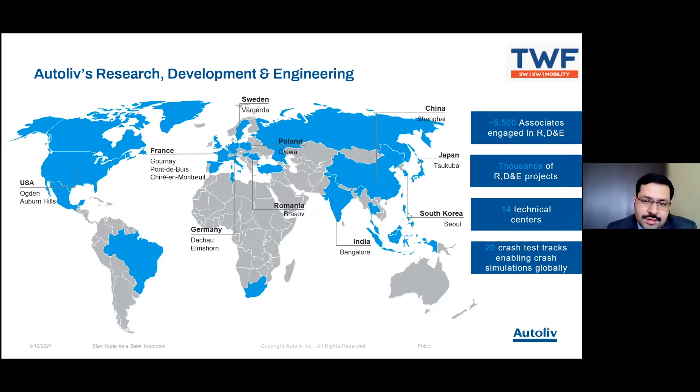Why this is relevant, I can also connect to the United Nations Sustainable Development Goals. These goals are mainly divided into 4 sections: universal access, efficiency, green mobility, and safety. When we talk about safety, there are 3 main targets in the Sustainable Development Goals. I would like to highlight target 3.6: to reduce road traffic injuries and deaths by 50% by 2030. There is also target 11.2, for safe and sustainable future transport systems.

So with this background, I'm going to talk about the relevance specifically in India. What is the current situation in India of power two-wheeler users?

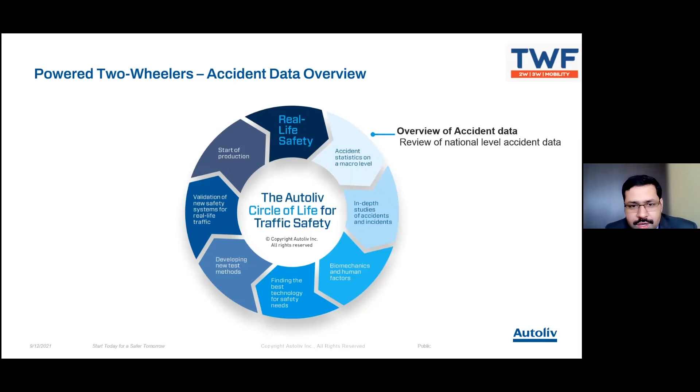Once we identify the problem, we can look into what kind of best technology solution can be given. Then, to evaluate these new solutions, we need to develop a new test method and validate the new safety system for real-world crash situations. Then it goes to start of production, and again the product will be tested against real-life safety. So the circle continues. With this background, I would like to start with the overview of the national level data from India.

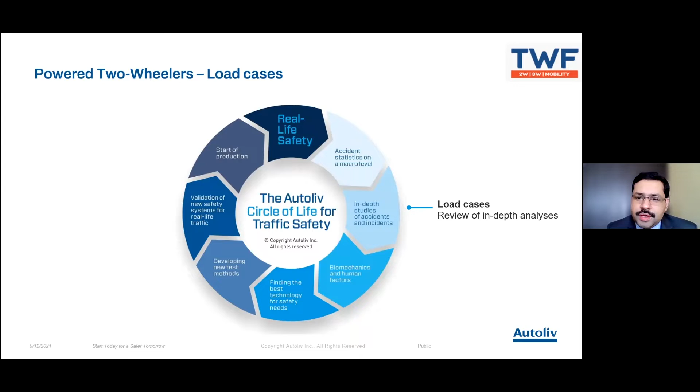Now I would like to show some of our research that we have done for different countries using in-depth accident data. Here I would like to show the data from three countries: China, Germany, and India. You will see the most frequent top two load cases from each country. As you can see, the crash scenarios and collision partners are different in different countries.

For example, in India, head-on collision with a passenger car is the most frequent, and the second most frequent is head-on collision with trucks. You will also see that the speeds, or average speeds, at which the impact occurs are also different.

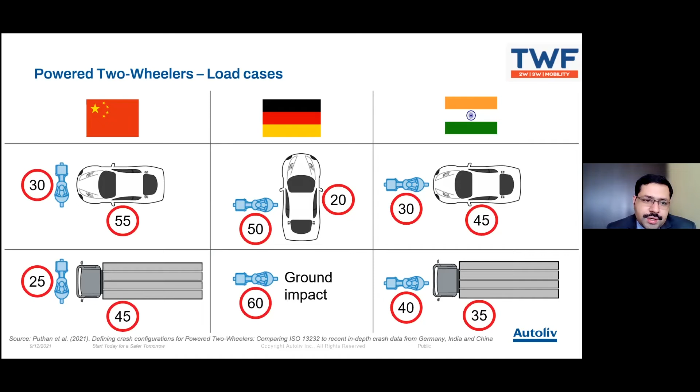So one solution developed for another country cannot be simply copied, as you know, the situations are different.

If you go into more detail, you will see that the top three scenarios are passenger car, truck, and power two-wheeler impacting power two-wheeler, which is the most common scenario, and that's what I have been depicting here.

More details can be accessed from the literature mentioned below. Now, what types of injuries are common, and this is what we need to address as of now.

If you look at the PTW riders' injuries in India from the RASSI data, considering all injuries, one-fourth happen to the lower extremities, mostly legs, then upper extremities, and then head.

If you look at the serious or killed riders, you will see that again 27% of injured body region is head, and another 22% is for the lower extremities.

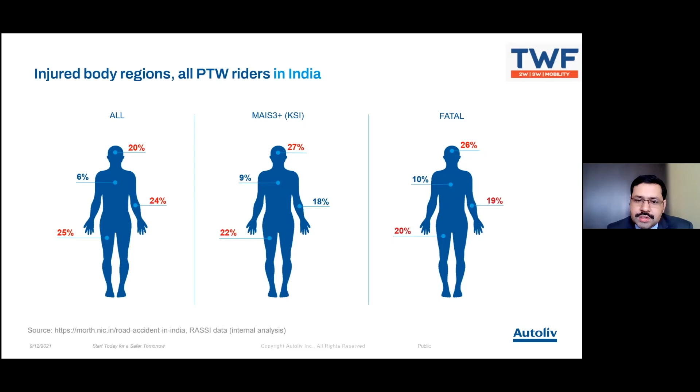If you look at only fatal power two-wheeler users, again one-fourth is injury to the head, upper extremities, and lower extremities.

We also understand that all the pillars of road safety are important. One aspect is the vehicle, the other is safer speeds, and the third is the road user, here power two-wheeler riders. And of course we also need safer infrastructure, better roads and roadsides.

Now I would like to show some understanding of biomechanics and injury severity, and how this can drive to the solutions.

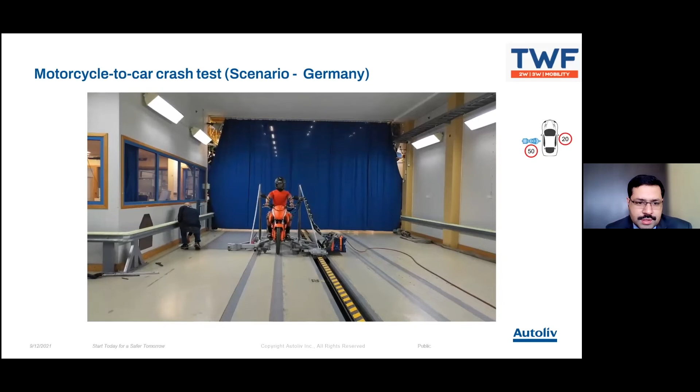Here I would like to show one example, a crash test that is most frequent in Germany, and how it is reconstructed in our facility. So here you would see the power two-wheeler impacting the side of the car.

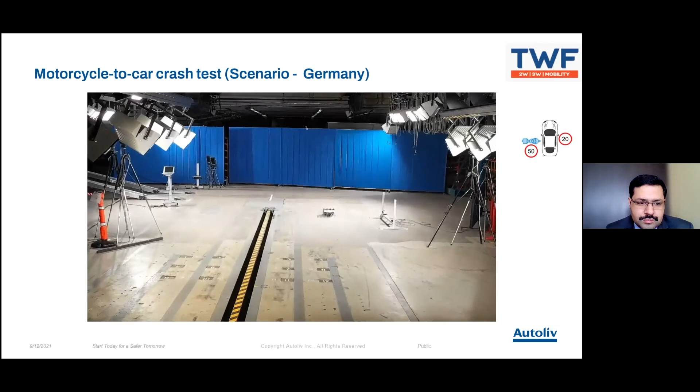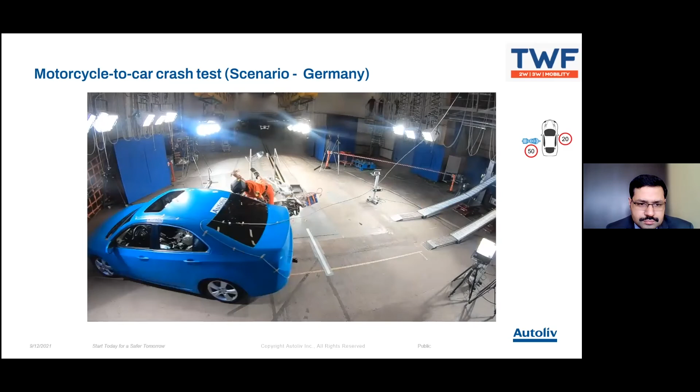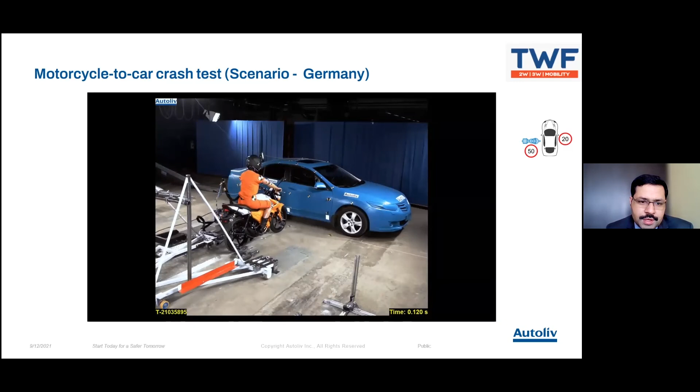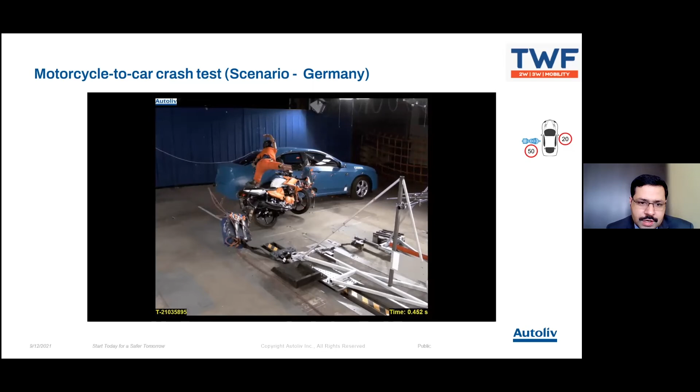As you can see, the kinematics of the rider after impact show how he is thrown to the ground, and the head hits the roof of the car. There is also hand contact with the glass and side body of the car, and you can see the deformation of the handlebar of the motorcycle as well.

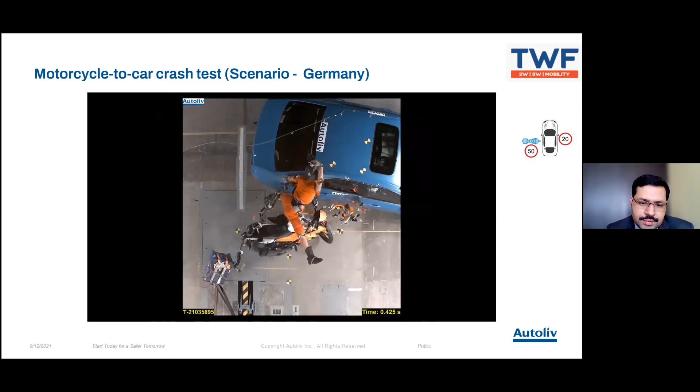And the whole event happens over nearly one second until the dummy comes to complete rest.

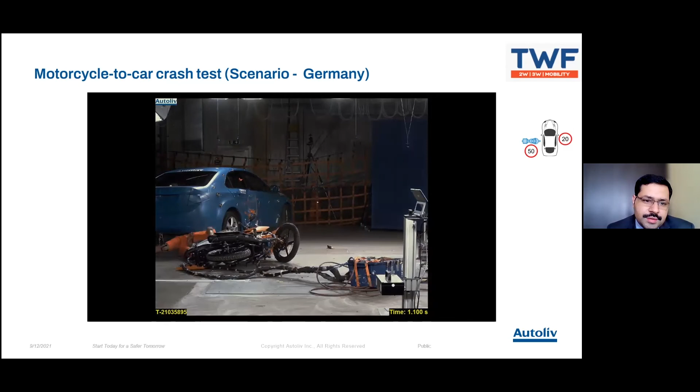So this is one example to understand the kinematics, and with this in background, what possible countermeasures can we do? This I call solutions.

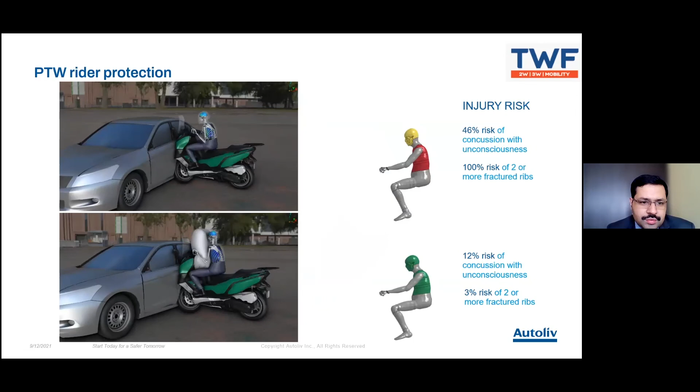Here you would see two animations. On top is the exact same simulation with the help of a human body model, where the different colors show the intensity of the injury being sustained.

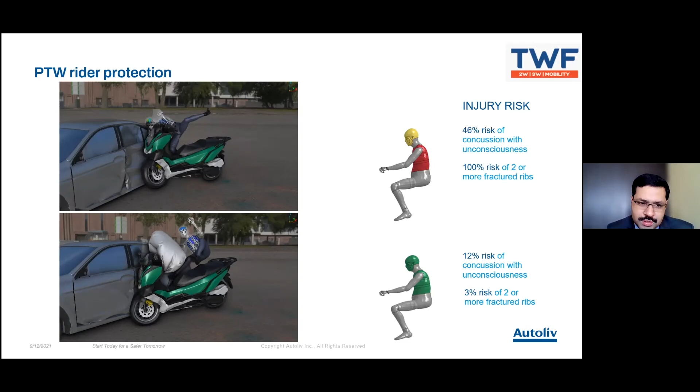Mainly to the head and ribs. The bottom one is the possible solution we can look into, where the airbag absorbs the energy, and you would see the injury risk probability is reduced significantly because of the airbag. This is one possible option, but there are other possibilities as well.

We can use the latest technology, connected apps, to coach and nudge the rider away from critical situations, giving suggestions and nudging towards safer road user behavior.

So I would like to come to the conclusions. As I spoke before, all pillars are different, but let's do what we can from the safety perspective, and from the manufacturer and supplier perspective, we can do it with the vehicles and road users.

With the experience of mobility safety and the history of Autoliv's innovation in safety solutions, Autoliv is uniquely positioned to save more lives on the roads.

And what is unique with us at Autoliv is that we develop our solutions from real world data.